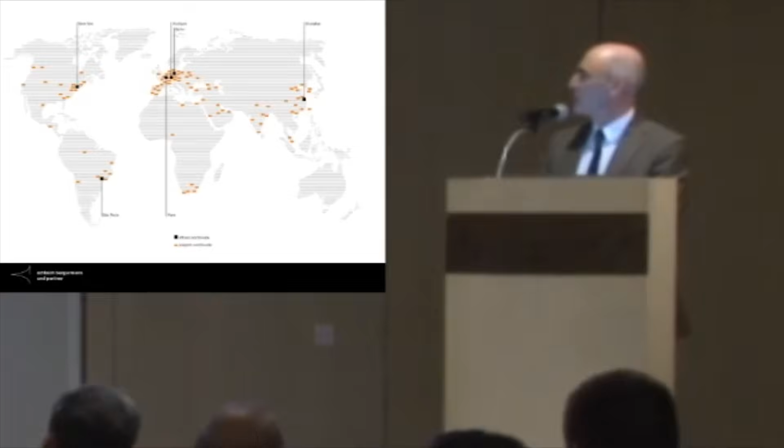So there's the main office still in Stuttgart, and I'm presently in Berlin. I'll tell you why later. There's an office in Shanghai, and the little orange dots are projects. So you see, we are active all over the world, and there should be a little dot in Singapore also. Anyways, my talk is about a German word, Gesamtkunstwerk.

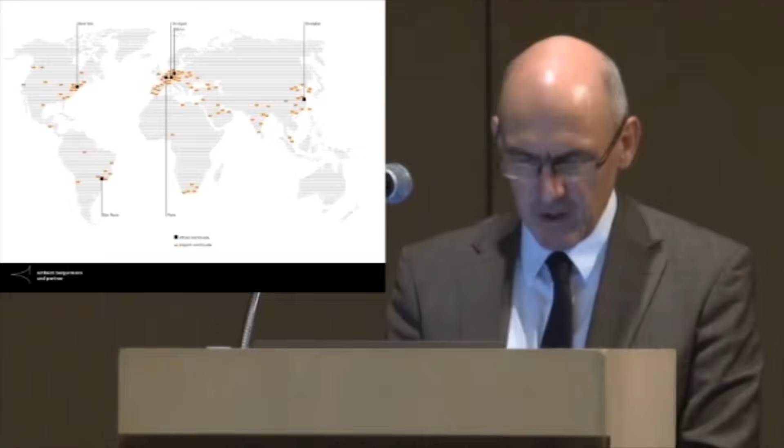My talk will be about goals, about ideals, about what we engineers should strive for, about the question, what is good engineering? And naturally, this will be my personal views, and you must decide if you want to subscribe to them. The goal can be illustrated with this German word that has made its way into the English language as a term in aesthetics. The dictionary defines Gesamtkunstwerk as an ideal or total work of art that makes use of all or many art forms or strives to do so.

My view is that structural engineers should strive for such an ideal in our work. By following principles of good building, we can provide quality structures that by themselves or as part of a building and together with other disciplines contribute to the culture of building and to the quality of all our lives. We can engineer quality structures that are or form part of the Gesamtkunstwerk. So this is the idea.

Naturally, these ideas come from somewhere, so I want to start with influences. What has influenced me? I'd like to talk about the question of what is good building, and I'll talk a little bit about the term elegance also, and then there's 2 more chapters, so to say, education and research. So this is what you're about to hear.

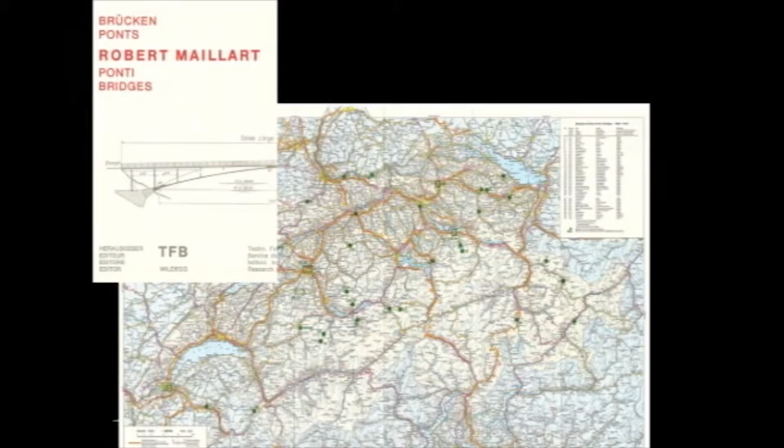I started studying in Switzerland, and I was very happy when I found this little map, and each of the green dots that you see here is a bridge by Robert Maillart. So since the ETH in Zurich is more or less centrally located, I could on the weekends go visit bridges. And this one you all know, that's the most famous one.

And it not only shows well-dimensioned sections, it shows elegance, it shows integration into the surrounding, it shows good design stemming from the context, it shows flow of forces, it shows beauty, it shows that someone has understood a material and used it in a proper way. All that can be learned from this bridge and the bridges of Robert Maillart.

And there's other good, well-known engineers I could study with, Christian Menn, and that's my favorite of his bridges, the Simplon Bridge, the Ganter Bridge. And it looks a bit like a sculpture. It's not easy to understand from the start, but if you take the bridge, the Ganter Bridge, and zoom in,

what you see at the top right, and then turn it upside down, what works in tension, if you turn it upside down, works in compression, and then go left, all of a sudden you see that it is a bit like an inverted raked frame, like Robert Maillart's Salginatobel Bridge. There is a striking similarity. Consciously or unconsciously, there is a history that can be seen in these bridges.

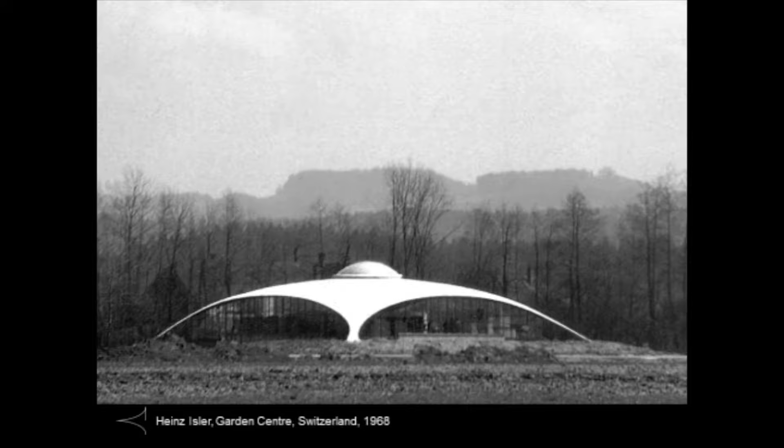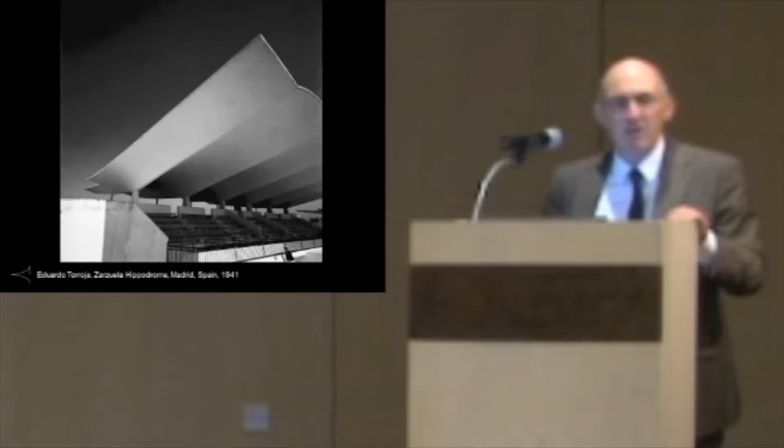One of them you see here, isn't it a beauty? And it's derived from hanging shapes, lightweight structures that at least impressed me very much for many reasons. After that, after 8 years in Zurich, I went to Spain and got to know Spanish engineering, and I found out that decades earlier in Spain, a lot of shells had been built already, different from the German shells.

There was Dischinger in Germany who in the 20s developed a theory of cylindrical shells, and the Germans built anything they could calculate. Once they had understood how shells were calculated, they built lots of cylindrical shells, but nothing else, while the Spanish, they built even what they could not calculate. And I think these shapes were much more interesting, to be honest.

So this is the roof of the Hippodromo in Madrid, and it was designed by model. This was a one-to-one model that Eduardo Torroja built in order to make sure that this structure that they could not really calculate at the time would work. And it also taught me about economizing, because the story is that once they had made sure that the model would work, they hammered the concrete away and reused the reinforcement later for the real building. That's another engineering virtue, so to say.

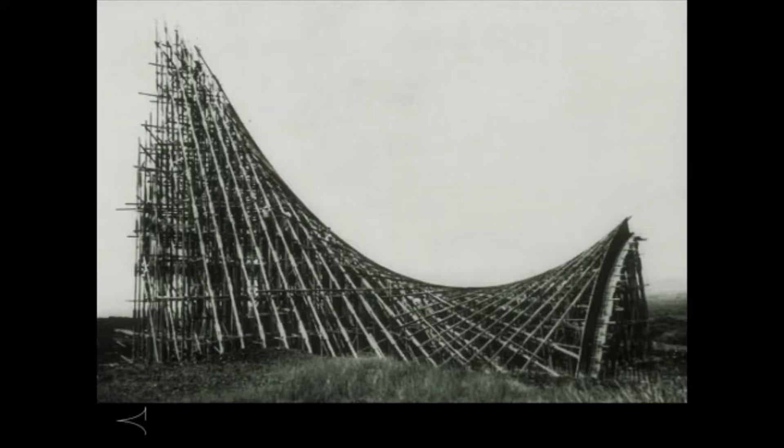This gentleman, Felix Candela, did most of his work in Mexico, but he is Spanish. He studied architecture in Spain. He almost went to Germany to study shells with Dischinger, but then the Civil War came and he had to go to Mexico and build a lot of hyperbolic paraboloids with this great idea that you can do this with straight generator lines, which makes scaffolding much easier. Another lesson that can be learned from this impressive gold medal winner from Spain originally.

Well, and last not least, definitely not least, my father, Jörg Schlaich. He was the project manager, the engineer in charge of the roof of the Olympic Stadium in Munich, the 72 games. And this structure still impresses today. If you go there, it's still something really special. And I think it also left a good impression about Germany. Germany, after the war, after all the heavy Nazi stuff, showed lightness, showed openness. It's a landmark structure for post-war Germany, and it's a lightweight structure.

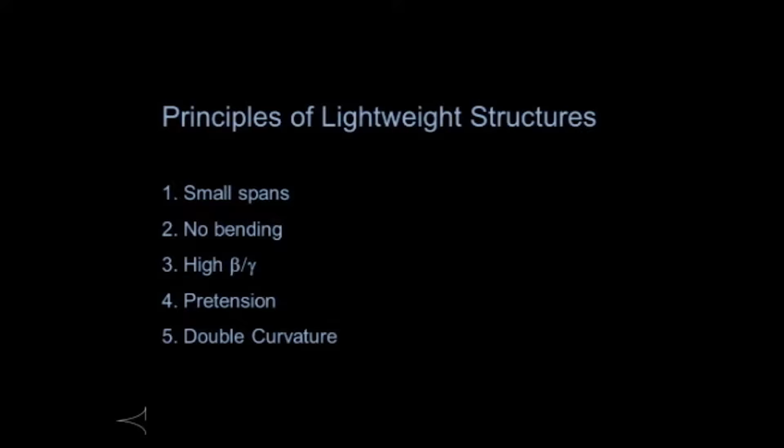From my father, I learned the principles of lightweight structures, and here they are, the secrets, so to say. There are 5. I found 5, and one is small spans. The smaller the spans are, the lighter your structure gets. It's something that we sometimes forget with our record buildings, record spans. We should avoid bending. The more we can work in tension and compression, the lighter our structures get, because bending is expensive. We should use long breaking length. High strength, low weight materials are very helpful, especially because they can be pre-tensioned, and pre-tension helps reducing deformations and makes our structure lighter. And finally comes the high art of engineering, double curvature.

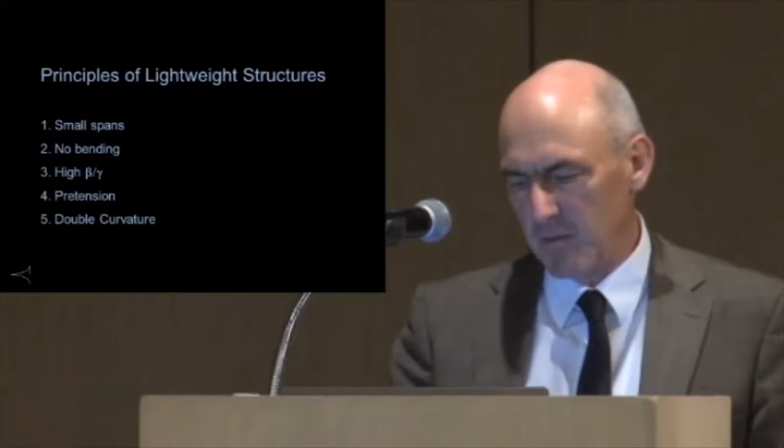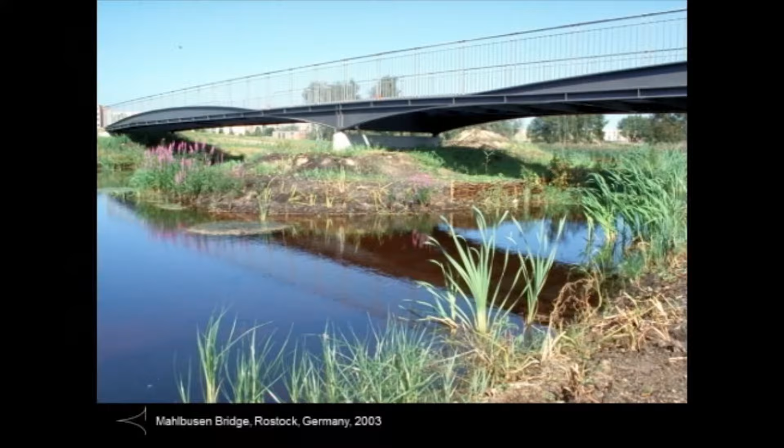Small spans. If the spans are small, then even stone plates can become slender. And if you have to work with bending, at least we can shape our structure so that they look a bit lighter. This is a 2-span continuous girder, and if you shape the bridge according to the bending moment distribution due to distributed loads, then a pedestrian bridge can look like that. Very lightweight, very economic also.

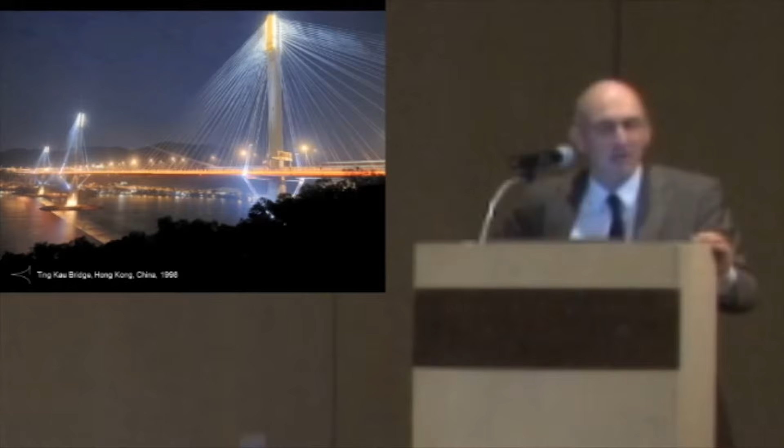And then when the bridges get bigger, then it's good to avoid bending. For 500 meter span, then a truss, and the cable stayed bridge is nothing but a truss, works nice. Ting Kau Bridge, Ian Firth and I got to know each other there on this project that cost me 5 years of my life, and I do not regret a single one. It was really very special times, learning a lot.

And then comes pretensioning, high strength materials, double curvature, all that you see collected on this little roof, which is in Wolfsburg. Wolfsburg is in Germany, where Volkswagen builds their cars, and they have a distribution center, so you can pick up your new Volkswagen. And what people then do, they drive away, and after 200 meters, they stop, they open the trunk, they look at the engine. So there were cars scattered all over Wolfsburg with new owners testing their cars, and this is why they decided to build a special parking place for the new car owners so that they can in peace open their car and look at it. And they needed a roof because it's raining quite frequently there.

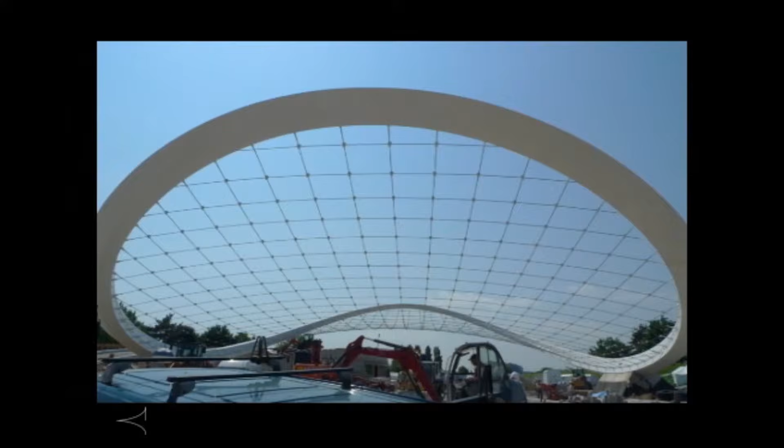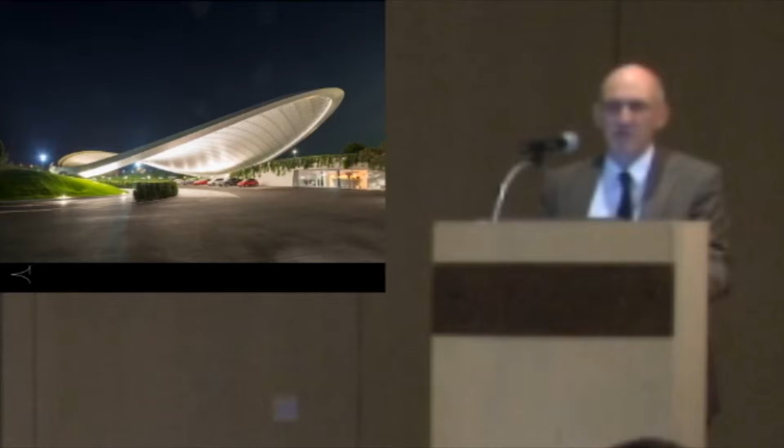And so this is how we could design this roof together with craft architects. Double curvature, high strength materials, stiffness through pretensioning. Here's the project at night. Just like a leaf, and again, there's historic roots. You all know the Raleigh Arena in the United States. This is where this comes from, but it's not supported along its edges. You know, it's freestanding, all balanced.

Now, I like lightweight structures, and I think lightweight structures are good structures, but what really is good structure, and even further, what is good building? I think we all agree that we need good buildings. Good buildings lead to quality of life, they enhance quality of life.

Good buildings need to be, however, I think, completely good. A building needs to be of holistic quality, a Gesamtkunstwerk. It cannot only be good in some aspects. It's not enough to just fulfill the codes, for example. So if you start designing, I think first of all, design work needs to be a conscious act. We cannot just start somehow by opening the codes. We have to really think.

And secondly, I think it's the context, like we have seen it with Salgina-Tobel Bridge. We have to study the boundary conditions. They can be topographical, they can be financial, it can be the chemistry of the design team, but there is always a local context that helps us to go towards a good design. Question is, is this enough?

I consulted books, and here are 4 of them that somehow again influenced me. The classic Vitruvius, the Roman architect. And what is interesting is he comes up with 3 principles for good design, and all the others also. It looks like there's always a trias, a trinity, where 3 principles fuse into one holistically good thing. So I think the first 3 are easy to understand. Firmitas, our buildings have to stand up. Utilitas, they have to be useful, and they better be beautiful, Venustas.

Many people would say it's the ballet dancer that we have heard about earlier, but it's a very subjective issue. Everyone has his own picture. Elegance has got to do with beauty, I think, but it's beauty plus. It's beauty plus movement, beauty plus lightness, beauty plus transparency. All this comes together when we think about elegance.

There was a IABSE conference in spring in Nara on elegant structures. And there is a lot of elegance in Japan to be seen. It's sometimes elegance plus purism, plus reduced forms, like this beautiful tea house with the window that looks like a painting in the background. I find this most elegant, and this is the Emperor's Palace in Kyoto, not like the German palaces' Baroque gold ornament. It's very reduced shapes that I think have got to do with elegance also.

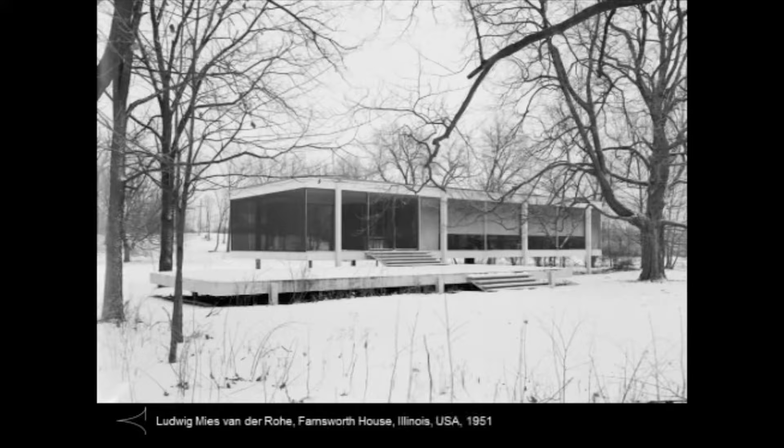There was the German architect Bruno Taut who visited these palaces, and he wrote books about it and published them in Germany. And the Bauhaus movement, I'm sure, was influenced by this book. This is Mies van der Rohe's Farnsworth House close to Chicago. I think it's elegant.

It's elegant, and I think it comes close to the most important definition of elegance, because elegance can be defined as effortless beauty. Beauty plus, but here effortless beauty, that means something is elegant if you do not feel that a lot of effort was put into it. It was not easy to achieve that. It looks natural, but it was not at all easy, but you do not see it anymore. So this is effortless.

I think that is an important characteristic of elegance. So I think elegance appears when the complex fusion of these principles of good building to holistic quality works, so that a Gesamtkunstwerk appears, that the Gesamtkunstwerk appears effortless. Elegance makes difficult matters appear easy.

Leading a good life is not easy, it's difficult, and we want to live it in elegance. And this is, I think, why we need elegant buildings, why we need elegant structures, so that we can perhaps say we want good buildings because they lead to a good life. We want elegant structures because if we are surrounded by elegant structures, perhaps we can live an elegant life.

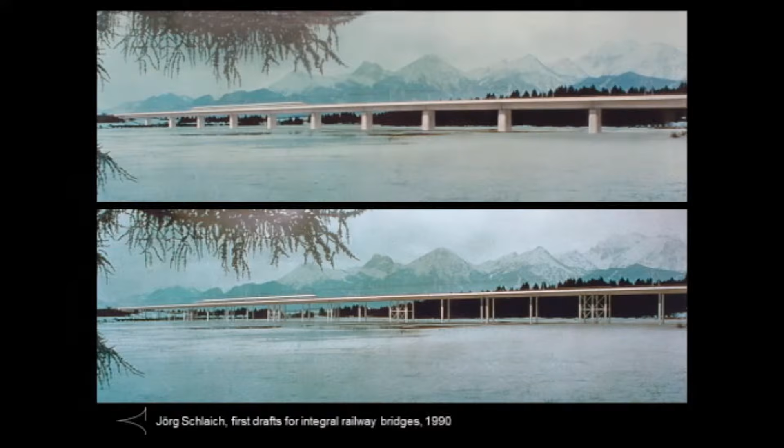Elegance you can see here, but it's not only the final product. Elegance can also be found in the way we calculate, in the way we construct, in the way we erect our buildings. There can be elegant structural approaches. And here's an example that my father drew in the early 90s. It's about integral bridges. I think integral bridges are quite an elegant approach to bridge design.

At the top, you see a typical German railway bridge, the standard design that was done all over Germany, no matter if there was a river or not. Every 40 meters there was a pier, and then they put the 40-meter post-tensioned box girders. And sometimes this makes sense, but not always.

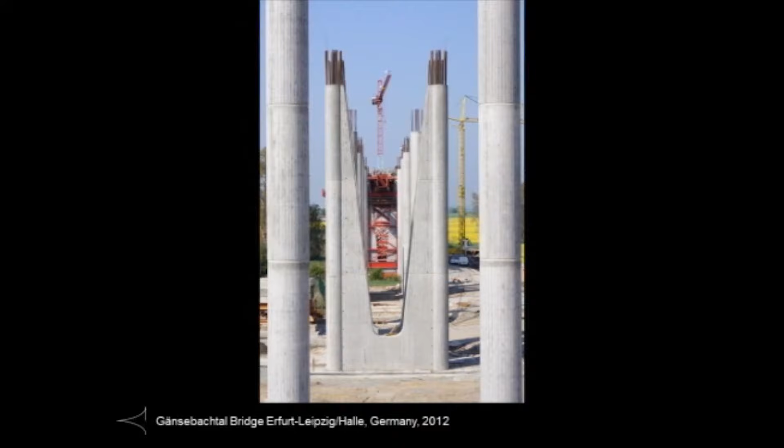If possible, there is an alternative shown at the bottom where it's a continuous concrete beam, small spans, and all monolithically connected. Then the bridge becomes much more slender and much more robust, even more economic. And the German reunification gave the possibility to build a few of those bridges. New railway lines had to be built to connect east and west, and that is the Gänsebachtal bridge close to Leipzig.

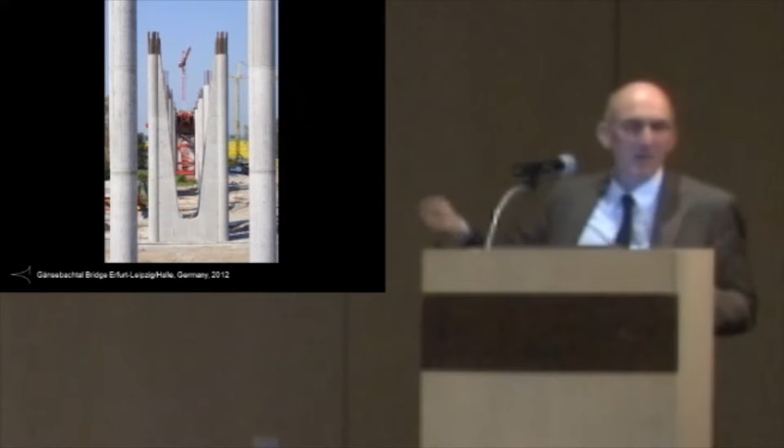Well, it's not the bridge yet. It's during construction, but you can see the slender columns and the reinforcement waiting up there to be connected to the deck. So there are no bearings, no joints in this bridge for a long stretch.

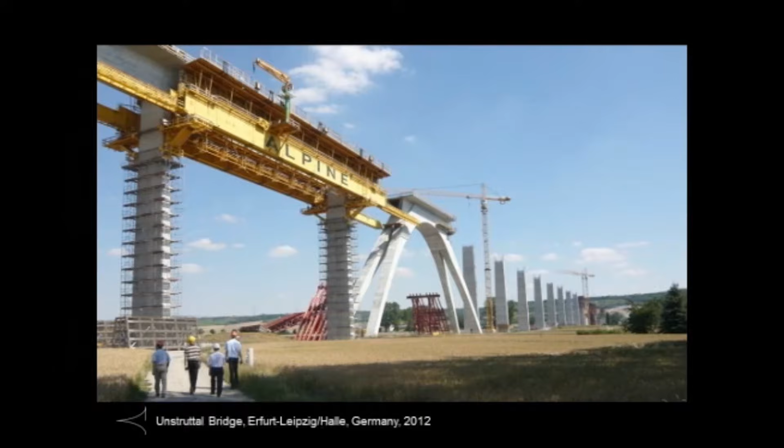Here's the next example, again close to the city of Leipzig. This is 600-meter segments with a central arch that again works for the braking loads. Again, at the top, you can see that the arch and the deck are monolithically connected, and this is how it goes all along the bridge. And here the finished integral solution. So I think integral bridges have a very bright future, so to say.

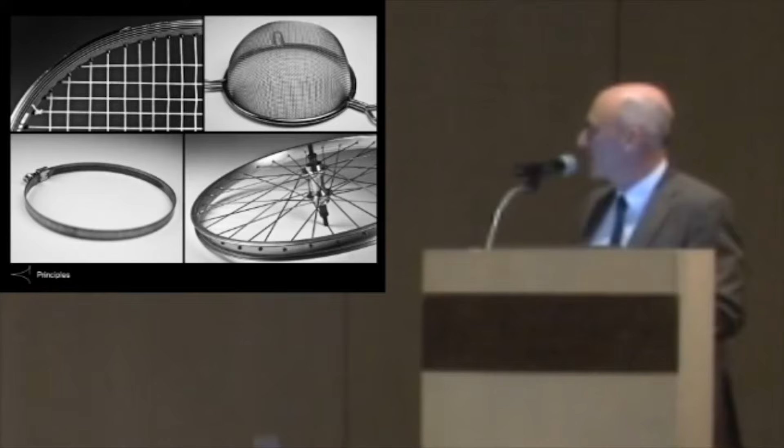I want to show you a bit more of our work. And it has got to do, I found, a lot with principles. Simple principles, simple ideas. The tennis racket, the salad sieve, the bicycle wheel, and just a little curved girder. And I'll give you some examples to show you what I mean with that.

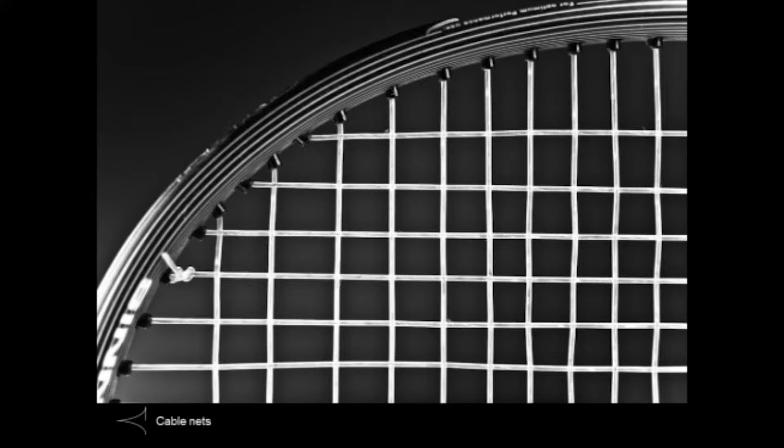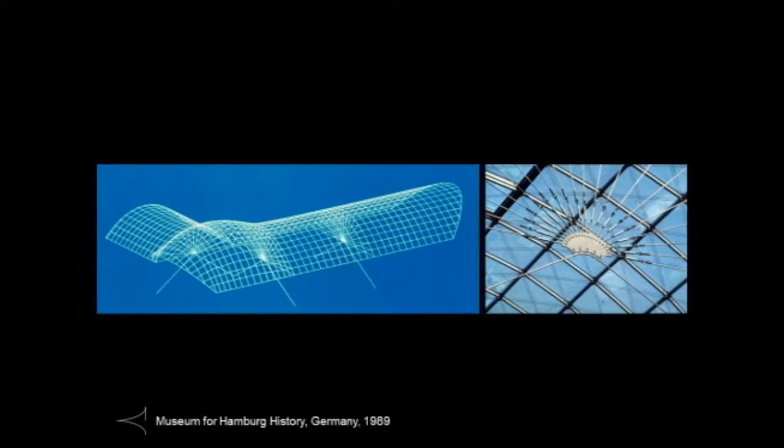The salad sieve. A salad sieve can be laid flat on the kitchen table if you cut it open with a pair of scissors. If you cut through here, you'll find out this net will go flat on the table, and you can deform it because there's a possibility of rotation in the joints, and all the squares that you have are of equal length. So you can build such roofs, such structures with all equal elements as long as you allow rotation in the joints. And the very first example was the Museum of the History of Hamburg in Germany in the late 80s.

It's a cylindrical shell, and then here comes the salad sieve where the two cylinders connect. This idea was applied for the first time. And again, the details. A cylindrical shell needs to be stiffened, and it can be stiffened by tension cables. And this is, I think, the joy of engineering, where you can detail such connections, where you show the flow of the forces, where you somehow try to produce something beautiful.

Well, ever since then, dozens of glass roofs, glass shells like that were designed in our office. I do not want to go into the details. It's just the one here I want to show, Bugis Junction here in Singapore. That's the only project that I found that our office has done in Singapore. And it follows this idea of the salad sieve, the all equal elements, steel elements, the stiff shell steel grid.

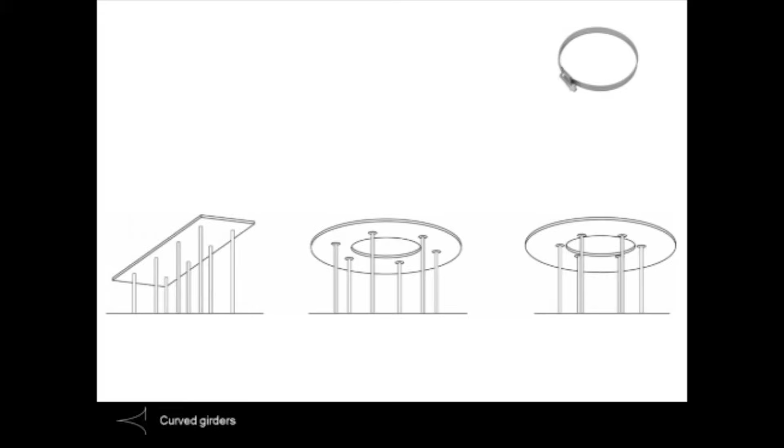Another concept, another idea that I want to elaborate a little bit more on is the curved girder. On the left side is a straight deck, a plate, and straight decks always need pairs of supports. If you take one row of supports away, the entire thing will fall over. There will be too much torsion. But if you have a curved girder, then you can support it with only one row of columns, as you can see here in the center, or you can move the columns also to the inner edge. You can support these curved girders by columns in compression, or you can hang it by cables. Then it would look like that.

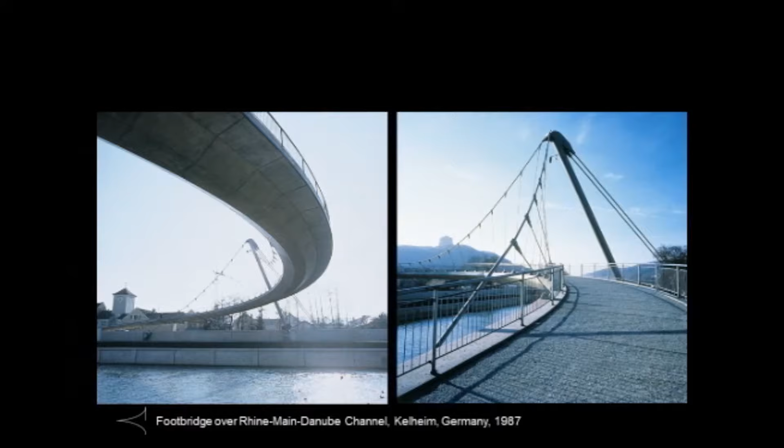Again, this is our first curved pedestrian bridge in Kelheim in the south of Germany. The curved girder is supported by hangers only on one side, and the torsional moment, so to say, that appears here can be converted by the girder into flexural bending, so it can stand up without any trouble. And also this system, this idea we have used many times.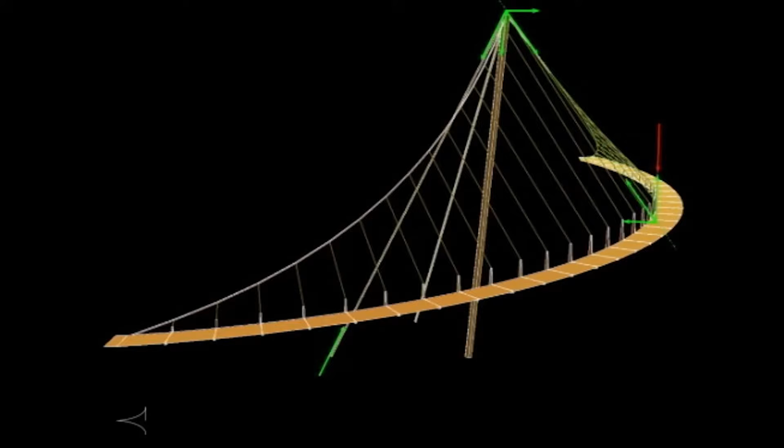The idea here is that little cantilevers prop out of the deck, and the axis of the cable thus can go right through the center of gravity of the deck, and this way torsion is avoided altogether for distributed loads. And this is how the bridge then looks. You see the individual cantilevers that have to carry bending by themselves, but the deck can be very slender. It's a 120-meter deck and only 70 centimeter structural height.

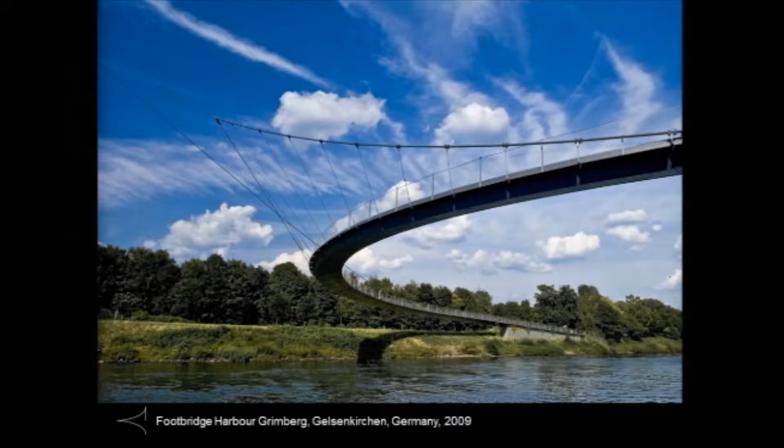So we have played a lot with these curved girders because they're really fun and they're not so expensive. So here's another example, a monolithic connection, again, an integral bridge, because these curved girders can breathe due to temperature. There are no big strains. So you can make integral bridges here also.

Again, the idea of turning things upside down. If you have a straight load, the cable will be in a vertical plane if you build such a suspension bridge. If you have a straight deck, you can just invert the hanging cable, and you get the arch in compression only.

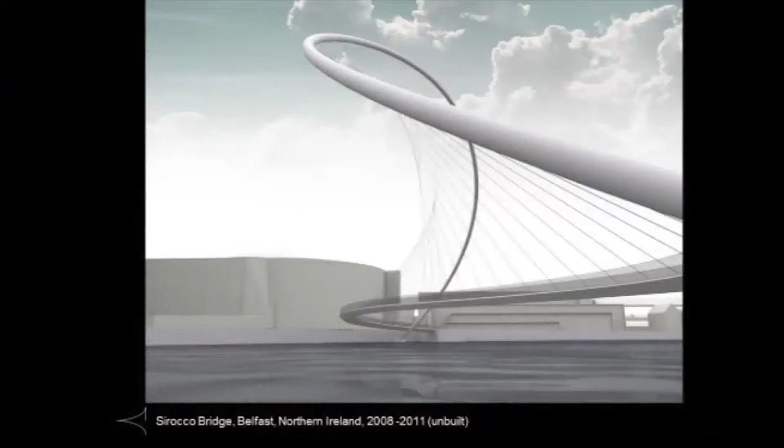The same you can do for a curved deck. If you have a curved deck, the cable automatically will be a 3D shape. It will be a 3D curve in tension, and if you put it upside down, then you would get the ideal form in compression. And we have toyed with this idea.

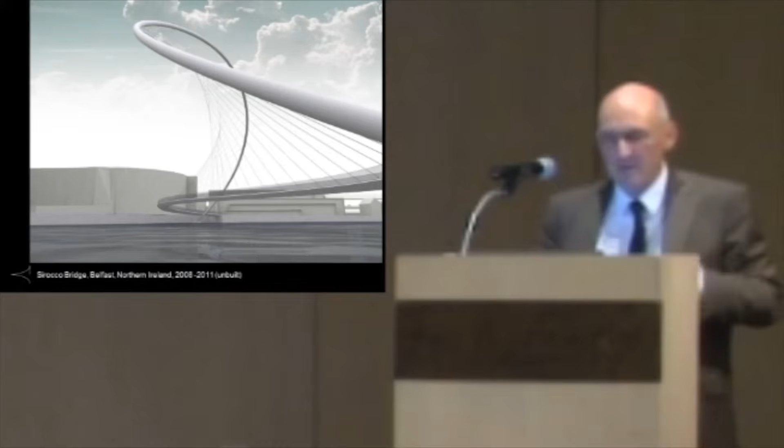This is a bridge in Belfast that we have done the detailed design for, but then the financial crisis hit hard, and so this is why it's not built so far. But this follows just the idea I just said. It's a curved deck supported only on one side, and then it's this arch that is basically the inverted catenary. It works in compression only for distributed loads, would be 120 meters and only 1 meter diameter for the tube.

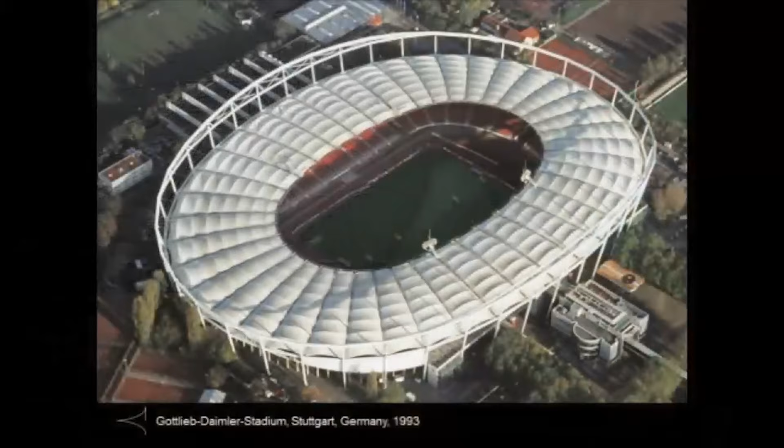Well, final concept here, quickly, the spokes wheel. It only works due to tensioning; highly tensioned spokes make this a very stable structure, an outer compression ring, an inner tension ring, and the first large spokes wheel that we have done in our office is this roof in Stuttgart. Works like a spokes wheel, outer compression ring, inner tension ring, and then the spokes, radial cables connected to tension the two, so that it becomes a very lightweight but very stable structure.

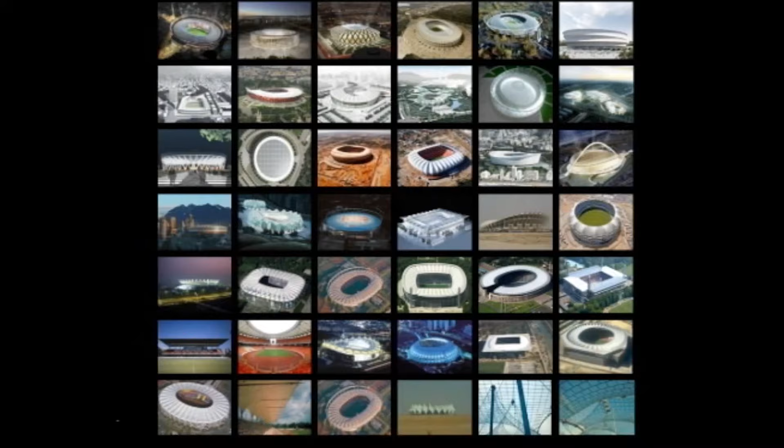And also from this idea, by now we have designed more than 24 or 30 stadium roofs like that. I just want to show you quickly one that I specifically like. It was directed by my partner Knut Göppert. It's the National Stadium in Warsaw, in Poland. That looks interesting from the outside as an overall concept. It's like a basket, a woven basket, painted in the colors of Poland.

And from the inside, you can detect that it is, again, a spokes wheel. There is an outer compression ring, there is an inner tension ring, but also there's a further component. There's a movable roof, because there's another basket here. This basket can be lowered, and then 12,000 square meters of membrane are pulled out and cover the entire inside of the roof.

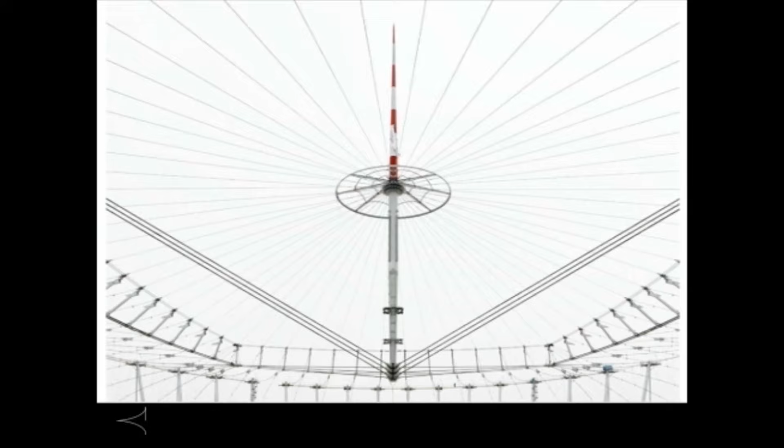Now all this is hanging on a large needle, 70 meters high, I think about 150 tons, supported. This supports the membrane later. There are 4 sets of cables at the bottom and more than 40 cables at the top. And here we go again to the detail. So if you go close to the bottom part, we are here, then this becomes a nice big detail of cast steel. And if you look at this one here, then you see the wheel here.

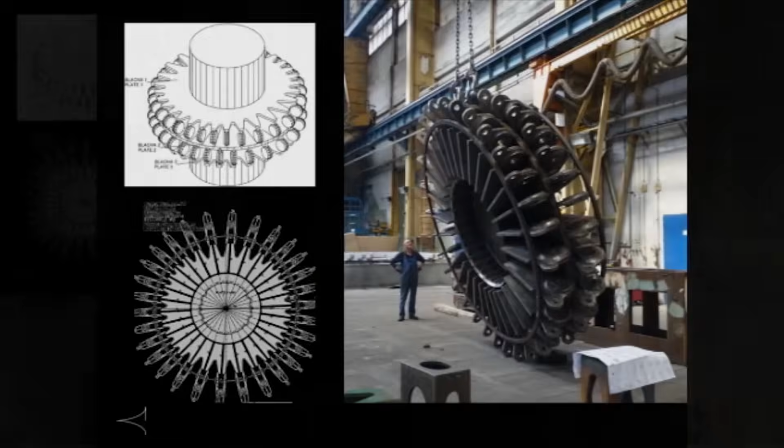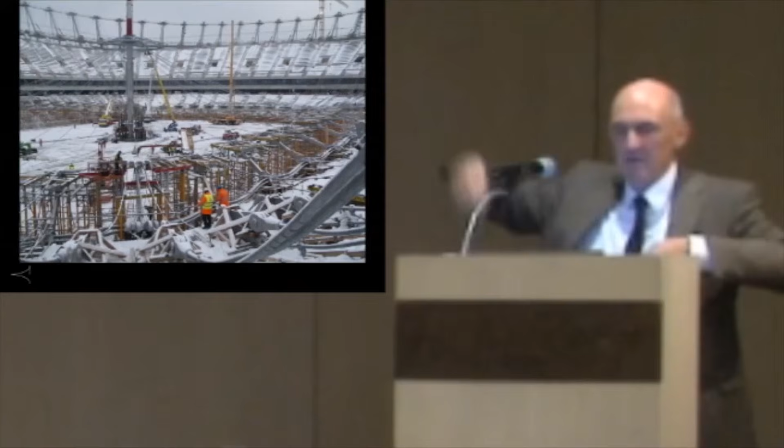And again, this is what I like so much, to detail the flow of forces so that it really works. And at least if you look at it from a distance, it looks even small and lightweight. This is how this column was erected. There was a hole in the ground, then all the radial cables were pulled, and this is how the needle then was lifted up. Here you see our details again, the cast steel element at the bottom and the welded element at the top.

Well, all this you can learn, but it needs to be taught. And this is why I want to now venture into the field of education and a little bit of research also. I became professor at the Technische Universität in Berlin about 10 years ago. And this is our lab. You'll see it in a second from inside. It's the old AEG factory. AEG means Allgemeine Elektrizitätsgesellschaft, and that is basically General Electric. So it's the German General Electric. They had huge factories until they disappeared in the mid-80s.

And this is the inside of our lab, 180 meters, where we can toy around, where we can do our experiments. And these are our students. And the first thing I tell them is that they chose a good profession. They chose a good profession because the individual can still visibly contribute to building, to society. You get your own building in the end. And they have chosen a profession where, like in very few other professions, you can combine creativity and theoretical scientific knowledge and creativity.

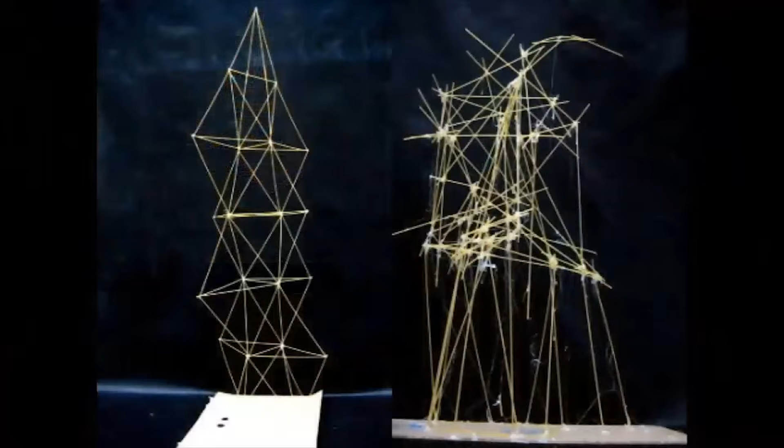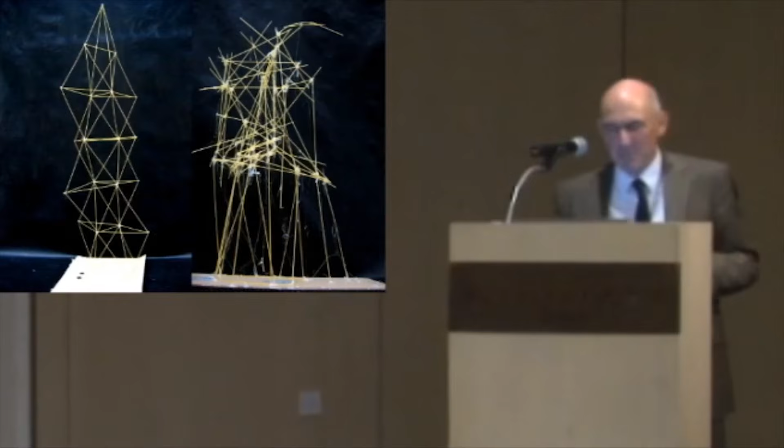And we have a big responsibility. Our structures last for 100 years, and they tend to be big. So we have to be careful with what we do. And I think this needs to be taught. And therefore we teach conceptual and structural design at the university. We believe in the basics, they're absolutely necessary, but on top of that, I think there can be more. And this is how I define conceptual and structural design.

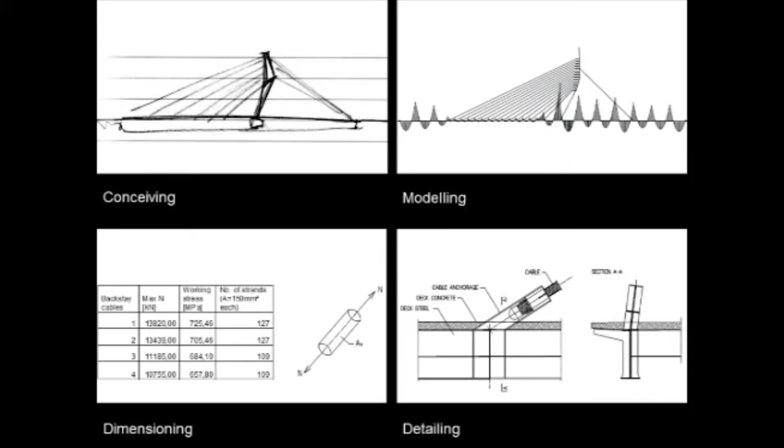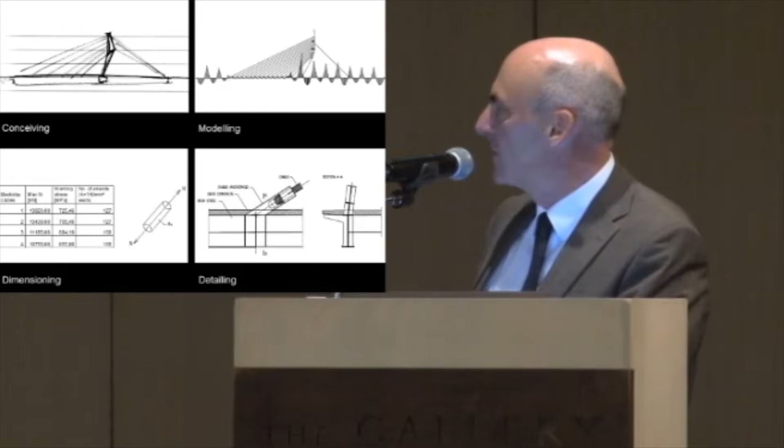The first step, top left, is conceiving a structure, the famous sketch on the napkin. Come up with an idea. And this is an educated sketch, so to say. You have to know the basics, but then you can do such sketches. Then comes a very difficult, I think, step of abstraction to convert this sketch into a model, into a finite element model, or whatever it is, to apply the loads, to get the forces. And from these forces, that's modeling, you do the dimensioning, you dimension the sections, you dimension the cables. That is done at many universities, these two steps.

But then comes the detailing. Our structures fail in the nodes. You have to connect the cable to the deck. How do you detail a nice steel node? I think that needs to be taught at the university also. If we do not teach it there, it might be too late sometimes.

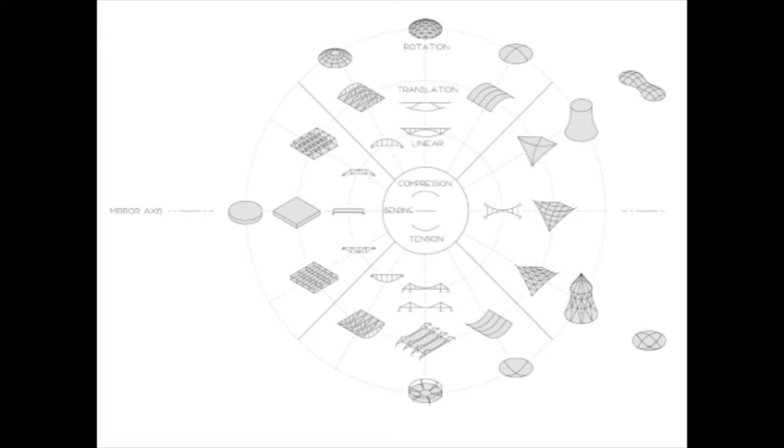And in order not to get lost, we have also made a little order of structures. I don't know if you can read it. Basically, the most simple components are the arch in compression, the cable in tension, and the beam in bending. Basically, everything can be derived from that. If you go to the first circle, the linear structures, the bridges are either arches in compression or hanging cables. You see there's a mirror axis. Basically, all structures can be converted from compression to tension.

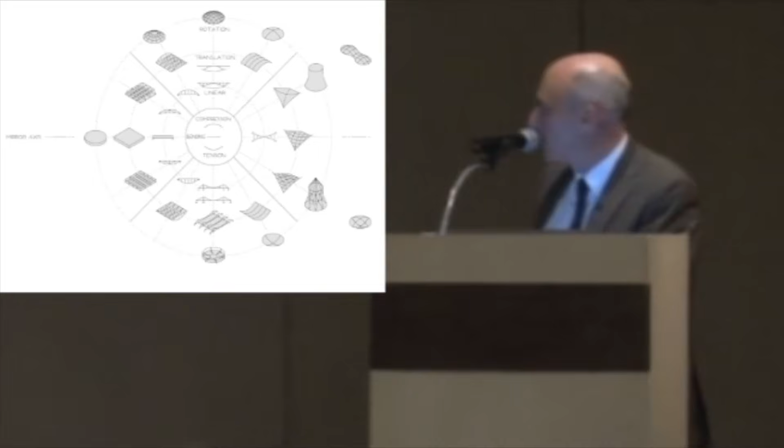If you add many bridges together, then you get a plate, from the beam to the plate, from the arch to the vault, and from the suspension bridge to the hanging roof. And you can even turn it, and then you end up in the world of double curved structures, in the world of shells. I mean, there are some structures that do not fit completely into this order, but that doesn't matter. There's a lot that can be explained with this, and that helps the students to somehow get orientation.

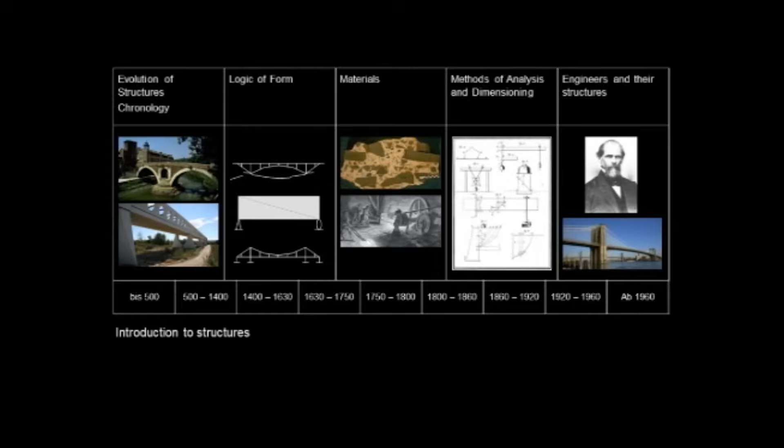We did an interview with our first year students, 18-year-old students, and we asked them who their favorite engineer was. And the maximum we heard was Foster. Isn't it? And they said, no. And so this is why we started teaching a class now, which is Introduction to Structures, where we go through history, actually from earlier than 500. We start with the Greek temples and the Roman arches. We go through history and we look at the evolution of structures. We follow Torroja's raison d'être, the logic of form.

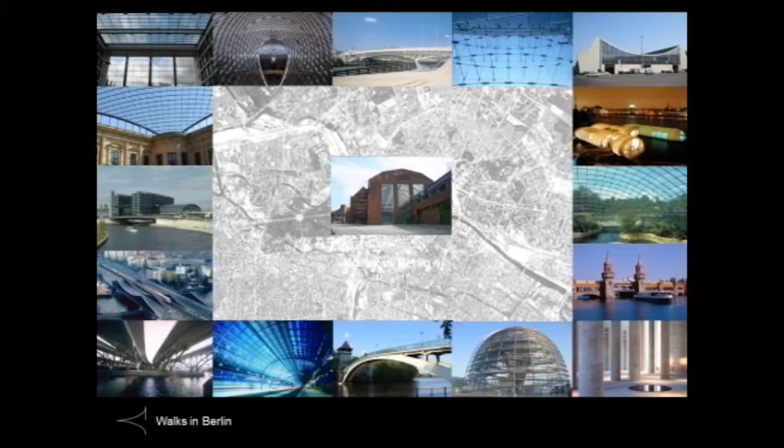We go through the evolution of materials, because the history of building is the history of materials: iron, steel, concrete. So it's very interesting to see how new structural types appeared, how Maillart worked with concrete quite differently than anyone else. Our history is also a history of analysis methods. The Bernoulli family and the differential equations changed everything. And finally, we showed them faces, persons, and buildings all through history. And after this first class, I think they all have the chance to have a favorite engineer.

We go for walks. Nothing special, but we go for walks and look at buildings to understand them, to study the flow of forces, to find out, can they be studied, or is everything hidden behind the facade? We teach for all materials, or independent of materials, however you call it. In German, we call it werkstoffübergreifend.

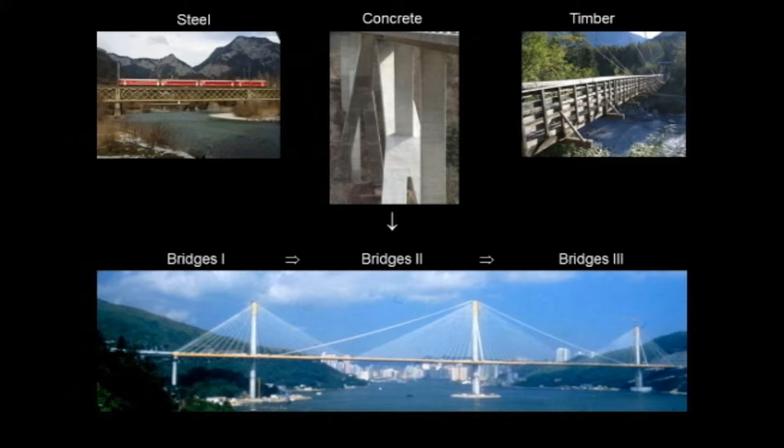Here is Switzerland. This is typical in Germany. We have a steel professor who teaches only steel bridges. We have a concrete professor and a timber professor. I don't know how it is in other countries, but this is an artificial boundary, an artificial wall between materials. And we try to teach bridges 1, 2, 3 independent of the material. Simple bridges, more complex bridges, but independent of the materials. This is how we try to do it.

And all this leads to possibilities for research, but I think the main research point is the issue of sustainability. I'm sure we cannot hear this word anymore, but still it is important. And Germany has opted for the so-called Energiewende. The Germans have decided to exit from nuclear and fossil fuel energy. And this is very brave for such a big industrial country, I think. But it has boosted a lot of research activities, and that I think is wonderful. And a lot of these activities have got to do with either saving energy or producing renewable energy.

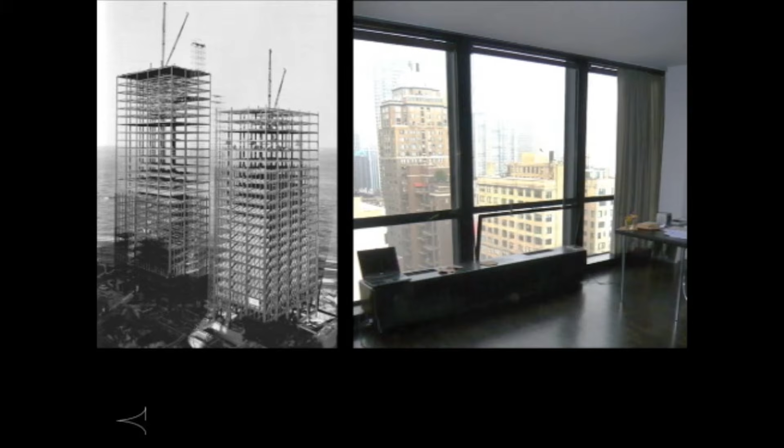So let me give you an example. This is, on the left side, the construction of 860-880 Lake Shore Drive, the famous Mies van der Rohe buildings in Chicago, very lightweight structures. During construction, you can see how sustainable they are in the sense that resources are minimized. If you look at the right side, this is one of the apartments today with single pane glass, with steel frames that go directly from the inside to the outside. So from the building physics point of view, this is almost naive from today's point of view.

And this is why, because we cannot only save resources, we also have to save energy. Such a very lightweight facade curtain wall could not be built in Germany, at least it could not be built anymore. Now, imagine for a moment that the energy we get would be almost free, renewable and clean. If that was the case, then we could again build buildings like that, very lightweight, that minimize the use of resources, and that can have single pane glass and steel frames in the facade, because energy is no issue anymore. And I think this is why we also have to think a lot about renewable energies.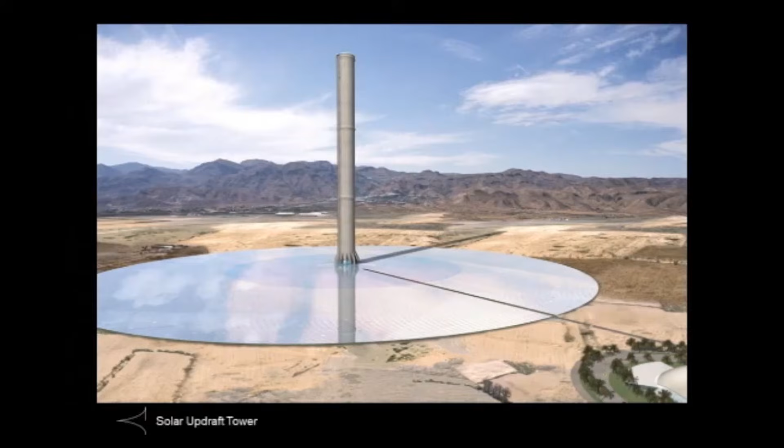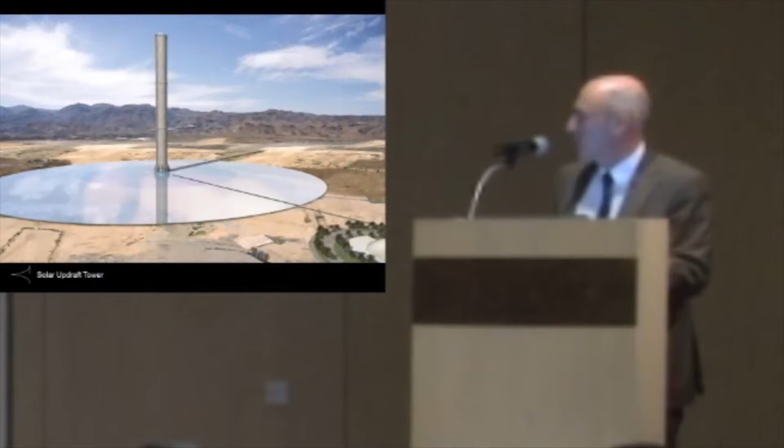And our dream, again, invented by my father, and we continue this. We want to build it one day. I'm sure it will be built one day, and I'm sure it can resolve a lot of problems. It is the so-called solar updraft tower. It's a huge greenhouse with up to 7 kilometers diameter. The sun heats the air under the greenhouse. The hot air wants to go up somewhere, and it finds a chimney in the middle, 1,000 meters high. Wonderful engineering task, about 100 meters diameter. And this artificial wind then turns turbines, turns large wheels that produce electricity.

So this is not built yet, but the power plant that I've shown you before, that's proven technology. There's no excuse anymore. We can build these right now anywhere in large quantities. But it will take some time. At this stage, energy, unfortunately, is not free, and it's not all renewable, and it's not clean, and therefore we have to save energy.

And these are two examples of cheating. This is a Swiss chalet in the mountains, in the Rhone Valley. And if you look at the corner, it looks like massive timber beams, right? But if you look closely, you see here rock wool and very slender timber plates. At the bottom, it looks like solid rock, but then it's only tiles, and behind it there's styrofoam, 20

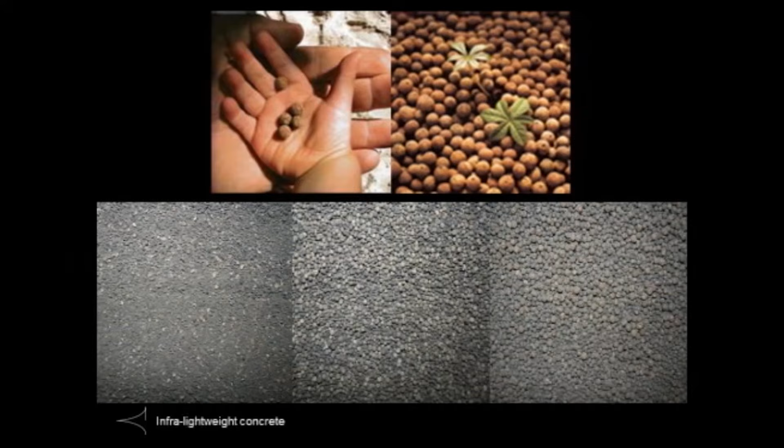centimeters. This is how we deal with insulation today, and we need a lot of energy to later save energy, and sometimes it doesn't even break even. And the Germans are a bit rougher. They just put the styrofoam there, concrete, styrofoam, and then you have plastering, and it's a wild mix of different glues and materials. If you ever want to break down this house, you end up with a lot of toxic waste. And this is why we have tried to find out if we cannot make concrete the insulating material.

So we have worked with what we call infra-lightweight concrete, very lightweight concrete with these clay bubbles as aggregates. We have made lots of experiments which were completely unsuccessful in the beginning. You see the clay bubbles up there and the cement down here, but in the end we could find mixes that work, and we are now building houses like that.

This is the first one from 2007, an all-concrete house in the cold, minus 15-degree Berlin winter, only concrete, insulating concrete, very lightweight concrete, 50 centimeter walls, but no additional insulation. That can also work for hot countries where you want to keep the cool air inside because it's hot outside. So it's no revolution, but it's an alternative to present insulation materials. Just make the concrete lightweight.

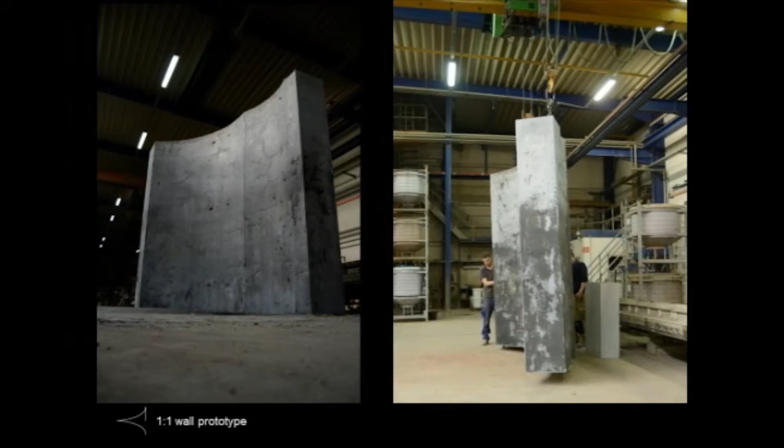Together with architects Barkow Leibinger, we have worked on large prefabricated elements. This is a prototype, a model of a house. So the pink elements would be infra-lightweight concrete elements. We've even won a competition. We took the money and built one large prototype. So you see, very lightweight. It can be carried with little cranes because this concrete is only 800 kilos per cubic meter. It's only a third of normal concrete.

And we got the Holcim award for this. So at least we have the feeling that there is some interest in these very lightweight concretes. They can be an alternative for certain problems. And presently, we are making a project with Barkow Leibinger in Berlin for, well, it's not a high-rise building, but a high building. For German standards, it's already high-rise, made of such infra-lightweight precast elements. So perhaps we are lucky, perhaps it gets built.

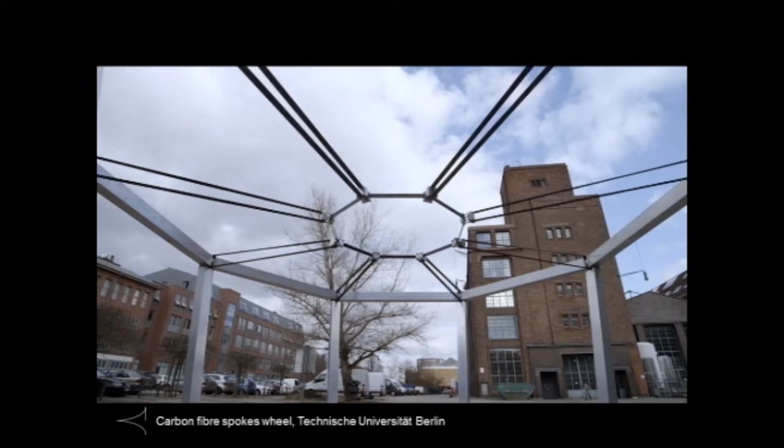And I don't think that it's enough just to glue carbon fiber on old concrete structures. It's a waste of this wonderful material. So we are trying to work with all-carbon-fiber structures. So this is our first little spoked wheel. But anyway, this just shows you the carbon fiber. See how slender it is here? It's very slender bands, highly tensioned. So strong you could hang a car on that, you know, but it's a few hundred grams of material.

Well, I have to admit the connections are still made of aluminum, but these bands, our PhD students make them themselves. You can do this yourself, and you see how slender these highly tensioned elements can become. So perhaps for stadium roofs, steel cables can be replaced by carbon very soon. I believe that this will be the case.

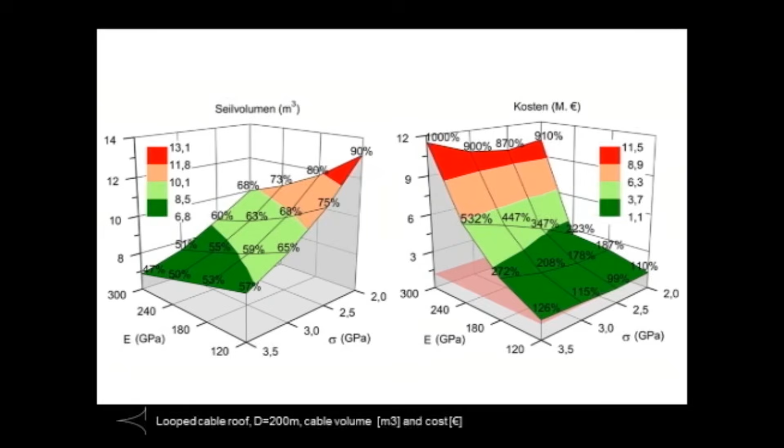This is the pink area here, the pink surface. That would be the cost of a steel roof, steel cables. We know a bit what these cables cost, and we have compared them to different carbon fiber cables. There are very different carbon fiber materials. You see down here the modulus of elasticity from 120,000 Newton per square millimeter to 300,000, and here the strength from 2,000 Newton per square millimeter to 3,500.

There are very different carbon fiber materials, and you see that there are extremely expensive ones that you use for satellites, but the ones with low stiffness, with low modulus of elasticity, they're in the range of 100%. That's the message here. You can build such a cable roof at approximately the same cost already as a steel roof.

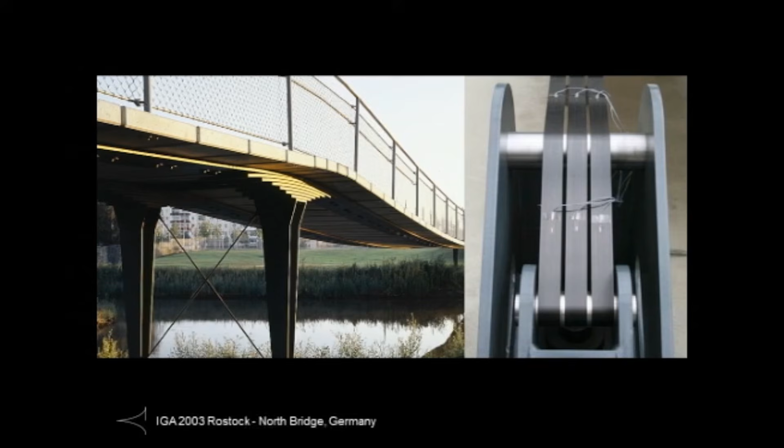We have years ago already played with carbon fibers for stress ribbon bridges. This is a typical stress ribbon bridge, the way we designed them in our office, a steel band. This is high strength steel, S460, two bands crossing a saddle here. And the bending is the problem there. The saddle causes a lot of bending in a 3 centimeter steel plate. But if you have 0.1 millimeter carbon bands, then you can wrap them around such pins without causing too much bending. So that was the idea.

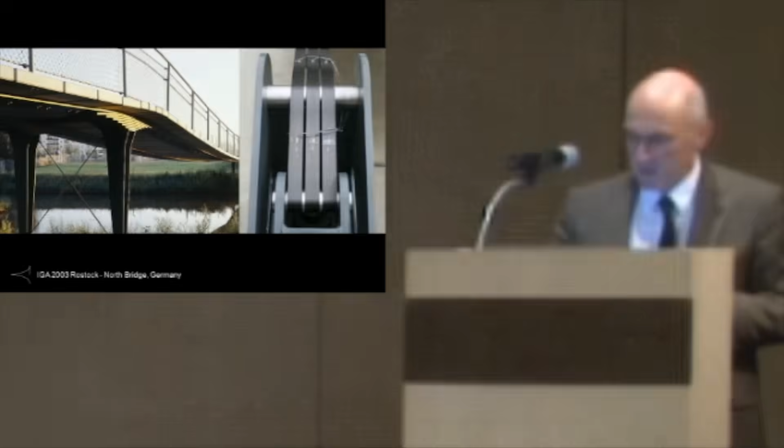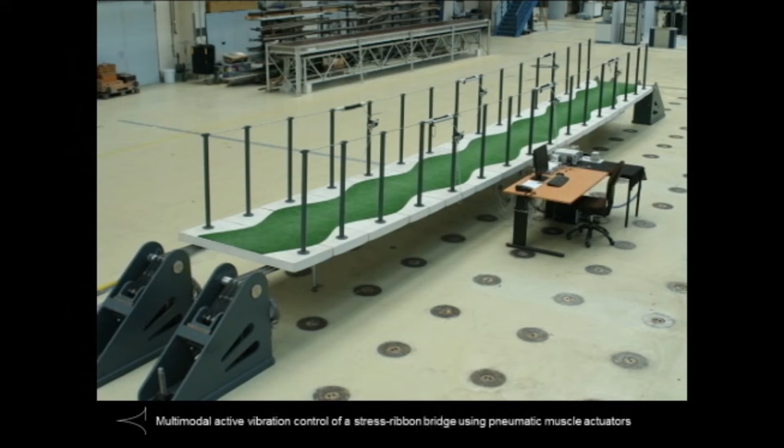We have used 0.1 millimeter carbon bands. We have wrapped them around 10 times, so the thickness of the band in the end is 1 millimeter. The highly tensioned band, this is in our lab again. And then we found out that it's very lively. That's the price you pay for very lightweight structures. It's a 13-meter span bridge with 1 millimeter of structural height, so you walk on it and it moves a lot.

And this is why we have extended the project, so to say. We have equipped the bridge with accelerometers, so it's full of sensors. These sensors can find out if it's the first or second eigenmode, or if it's torsion. There's a processor here, and this processor then helps to inflate artificial muscles, tubes, within milliseconds, basically in real time. So whenever there's a movement, there will be muscles that counteract. They're inserted in the railing.

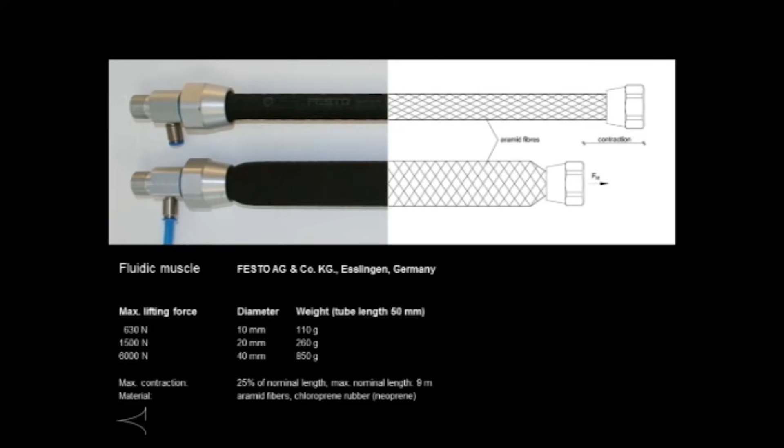You see these muscles here? They're nothing but tubes from Festo. So this is the uninflated tube, and if you inflate it, it gets bigger and it contracts, and the forces are up to, what was it, 6,000 newtons. And when they counteract, they reduce the accelerations, they reduce the movement a lot, the damping is tremendous.

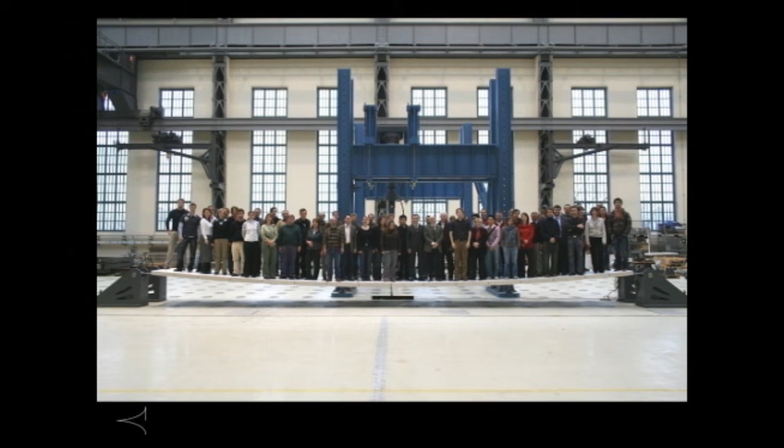Little machines. It was a PhD thesis, and it was a lot of work and a lot of fun to do that. And the bridge can carry the load. This is the proof. Well, and perhaps in the future we can then build bridges like that, roofs like that with carbon fibers also, because this would be a wonderful project, because it's highly tensioned cables and cable nets.

Anyway, this is my last slide and my thoughts on the Gesamtkunstwerk. My views got shaped by the achievement of other engineers, and I wanted to first pay tribute to these personalities, and my father is certainly one of them. I try to describe the principles of good design, the way I see them, and how we try to practice them in our office. Such principles need to form an important part of engineering education, and they can fuel scientific research to face the coming challenges in our profession.

I think that well-educated engineers who know their history and who can combine sound theoretical and scientific knowledge with creativity are able to fuse the arts of construction into a Gesamtkunstwerk.